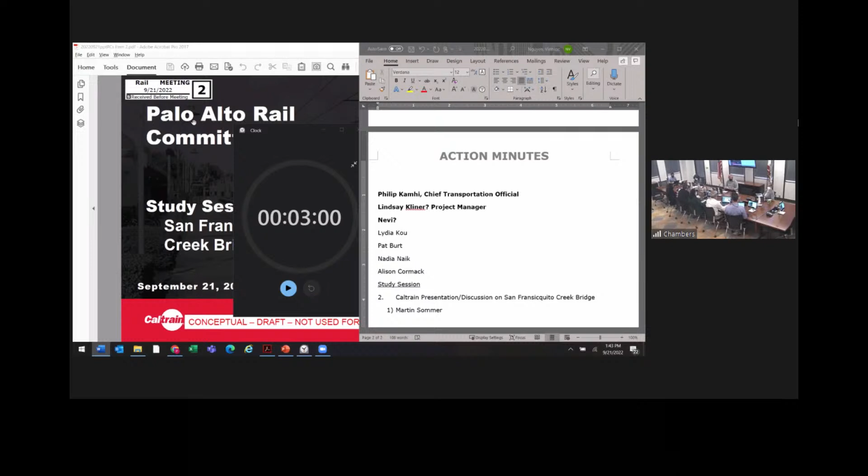Before we move on to the next, we need to take public comment. Oh, yes, thank you. We'll see if there's any public comment. Mr. City Clerk. There are no requests to speak. Okay, very good. Then we can close that and move to our study session. Item 2, the Caltrain presentation, discussion on the San Francisquito Creek Bridge.

Francisquito. Yes. Again, good afternoon, Vice Mayor Kou, Mayor Burt, Councilmember Cormack. We really appreciate the opportunity to share information on one of Caltrain's 98 railroad bridges. Lindsay and I are here to give you that update on the San Francisquito Bridge, providing the background story, an overview and the analysis that we did, our recommendation on next steps, a draft preliminary high-level schedule, and then share some thoughts on goals and next steps. With that, I'll turn it over to Lindsay for the background.

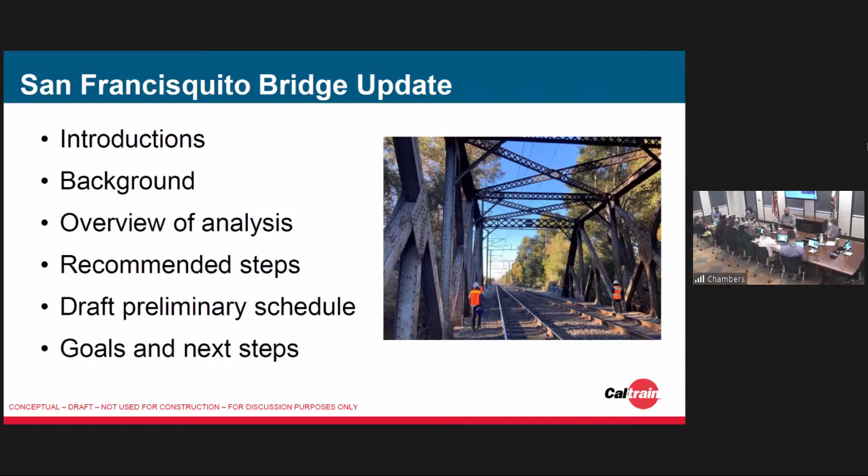Okay, great. Hi, everyone. Just gonna take my mask off for a minute so you can hear me better. Please advance to the next slide. One more. Okay, great.

So I'm going to dive into some of the history of the bridge and the context of the area surrounding the bridge. We've got 2 photos here. The one on the left shows the original structure of the bridge that was built in 1864. The structure was made of wood and it was single track. You can also see the El Palo Alto tree there. The structure that stands today was built in 1902. It's shown on the right, the darker image with the train going through. It's double track, and thankfully is no longer made of wood. It's a steel truss structure, and given that it was built in 1902, it's over 120 years old.

The name for the creek, San Francisquito Creek, gives the name to the bridge itself. It spans over the San Francisquito Creek, which is the border between Palo Alto and Menlo Park in this area. And the El Palo Alto tree is just beside the bridge, very close to the east, shown in both of these photos. It's important to note that the bridge and the tree are eligible for the National Register of Historic Places, and that's a topic we'll dive into more detail later during the environmental phase. Next slide, please.

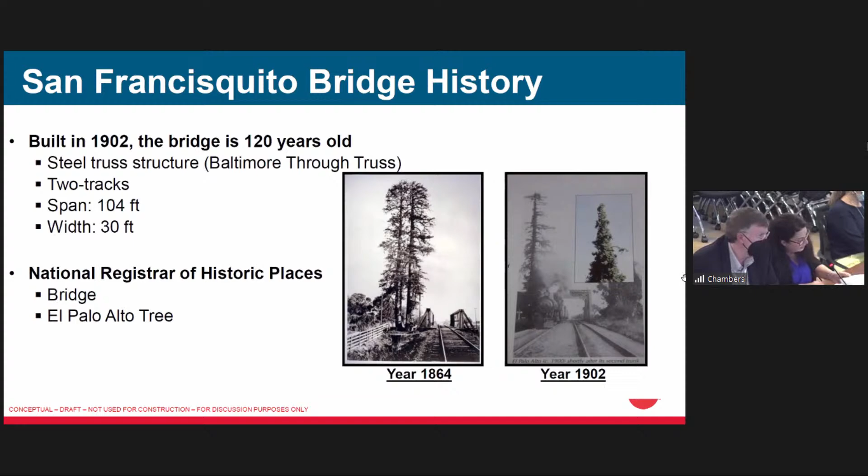Great. So now we're going to look at some maps to get oriented on the geographic context of the project. The creek, again, is the border between your city and Menlo Park. It's also important to note what jurisdictions we're dealing with. Palo Alto is located in Santa Clara County. When you cross over the bridge into Menlo Park, you are in the county of San Mateo. So this geographic area spans not just 2 cities, but 2 counties.

Starting south of the bridge, moving north up the right of way. You can see the north arrow, we've turned it on its side for ease of viewing. We've got the Palo Alto station, almost a half mile from the bridge. We've also got El Camino Park, in green, and downtown Palo Alto on the other side of the right of way. And I want to point out our key area, and we've got colors to help.

In yellow, you'll see the Palo Alto Avenue intersection, which is currently at grade. It is only 330 feet, what I like to call a stone's throw, from the San Francisquito Bridge, shown in red. And we've labeled the El Palo Alto tree with a little icon in green. So you can see how everything's quite close. Not only is this area geographically constrained in terms of space, but the creek itself is a sensitive environment. Some of us may recall it was the site of a serious flooding event in 1998.

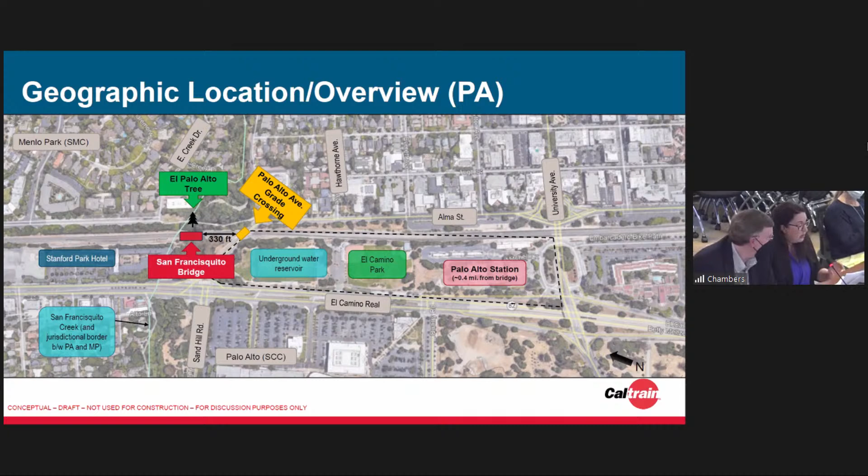And I'd like to move on to the next slide where we can transition slightly north on the right of way and take a look at the Menlo Park context. So moving north into Menlo Park, you can still see the San Francisquito Bridge in red, and then that small yellow rectangle is the Palo Alto Avenue intersection. So first, in sort of a darker blue, we've got the Stanford Park Hotel. That's private property that's just right along our right of way.

Along the back side of the hotel, so that's the west side of the right of way, there is a rain garden / bioretention area that's associated with the Middle Plaza project. And if you just move slightly north, also in turquoise or teal, is the Middle Plaza development. It's being developed by Stanford University. It is their property. It's going to be a mixed-use retail, housing, and commercial development. It's fairly far along. Construction started in 2018. And if you go by there now, you'll see that they started paving and sidewalks.

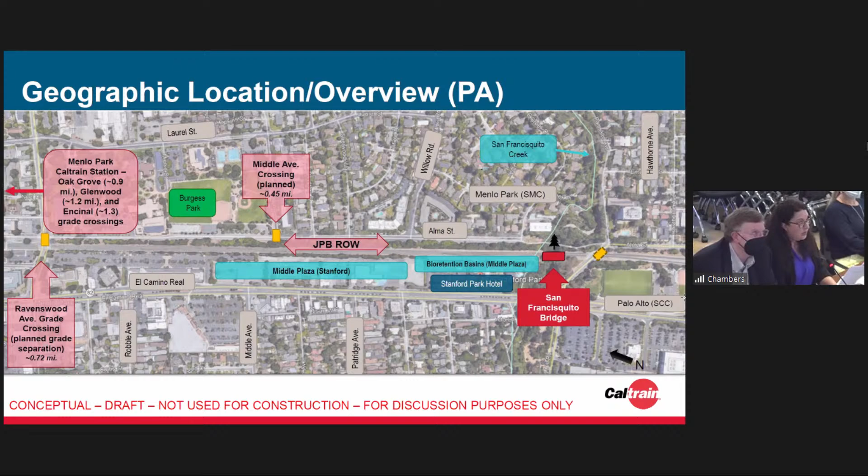Then just a little bit on the other side of Middle Plaza, also in yellow, we have the Middle Avenue undercrossing. And this is a planned undercrossing exclusively for bikes and pedestrians that's currently around 30% design. We are working jointly with the city of Menlo Park on this project and have a service agreement with them.

And then as you move further north, we've got several grade crossings. Ravenswood grade crossing is the first one just past Burgess Park. That is still in the planning stages with the hybrid option currently being recommended by the board in their 2019 project study report. And then as you move further north, not all shown here, there are several other crossings. We have Oak Grove, Glenwood, Encinal, and they're all closely spaced about 1/10 of a mile to 1/3 of a mile apart. And we can move to the next slide.

This just gives you another view. I think it's really helpful just to get that bird's eye aerial view. So this is an aerial viewpoint of the bridge looking north. You can see Alma, El Camino Real, and you can see how close the Palo Alto Avenue intersection is to the bridge. And then in the bottom right-hand corner is a photo of the Palo Alto Avenue intersection looking east. And then also on the right, we've listed exact locations like the milepost, in case that's helpful for orientation.

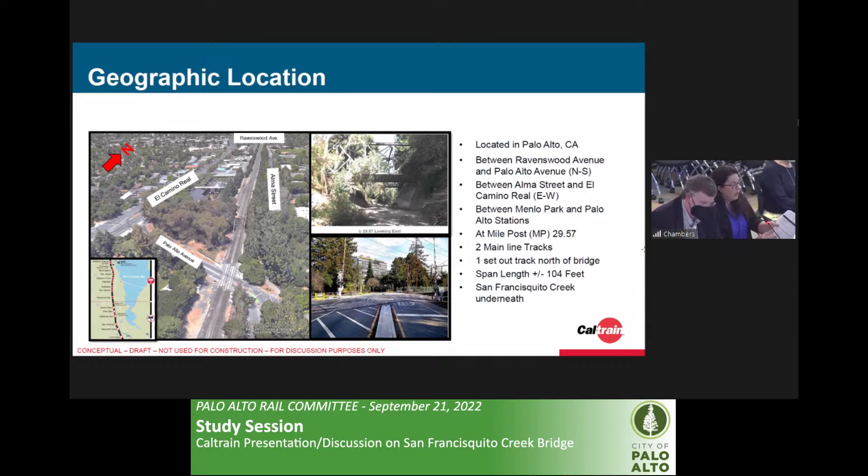I think the key takeaway here we really want to emphasize is that the grade crossing is very close to the bridge. Again, it's about 330 feet away. And next slide, please. So I just want to talk a little bit about our activities to date. So following engagement with jurisdictional stakeholders in the spring of 2021, including Palo Alto staff, we decided that we needed to conduct a detailed inspection and analysis of the San Francisquito Bridge. This was driven by a few factors. So as we mentioned, the bridge is over 100 years old.

And secondly, although we regularly inspect all of our bridges for safety and FRA compliance throughout the year, we needed to do a detailed inspection to understand the condition of the materials underneath the ballast and also any steel elements that can't be seen by the naked eye. So we did just this in the fall of 2021, which Rob will be talking more about in the next slides. We've got some great pictures of when we had our team out there.

And you might also be curious about who we've been speaking with, who are the stakeholders we've been coordinating with during the course of this project. So I mentioned, of course, Palo Alto. We've also been coordinating with the City of Menlo Park, the VTA staff, the San Francisquito Creek Joint Powers Authority, and the Stanford Land Buildings and Real Estate Group.

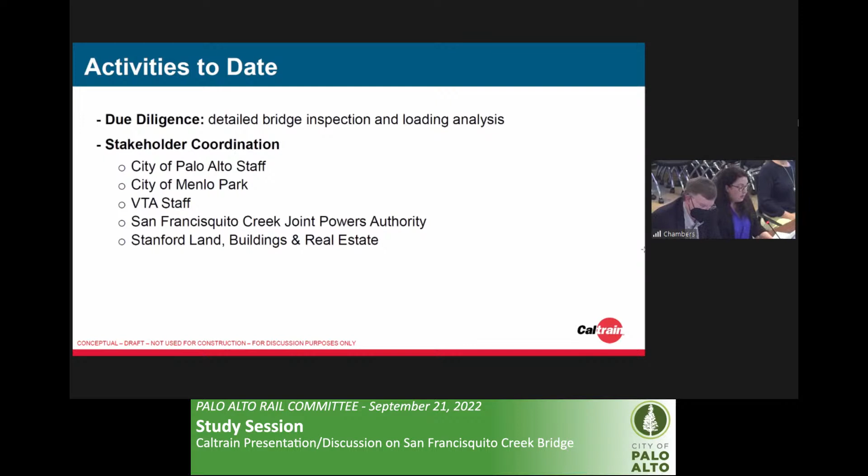And we just wrapped up another round of engagement with these stakeholders this summer where we've been sharing the same information, the same updates we're sharing with you today, where we've come back and said, these are the results of our detailed inspection and our loading analysis. So next, I'm going to pass it to Rob, and he's going to talk about this bridge inspection and what we found out.

Thank you, Lindsay. Next, I'd like to share the information on what we did to improve our understanding of the current status of this 120-year-old bridge. This included 3 weekends worth of work. Our first weekend, our teams removed the debris and vegetation to get a good look underneath the hood. Our engineers also performed inspection of the track and the bridge members from the upper area. And we also documented existing conditions with some on-site photos of the bridge, the El Palo Alto tree and the surrounding conditions. Next slide, please.

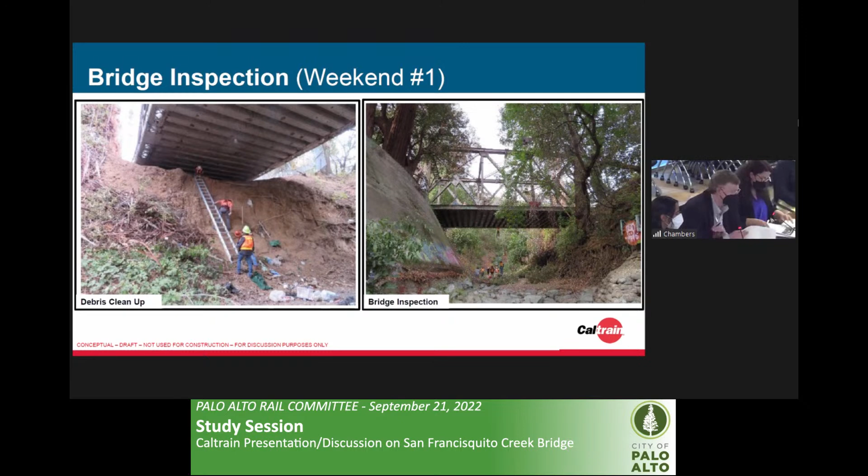During our second weekend, we performed 3 distinct activities. The first was performing the inspection of the underside of the bridge now that all the debris was cleared away. The second was performing a detailed LiDAR scan of the bridge to create a highly accurate 3D model to support our structural analysis. And the third thing we did was set up equipment to measure the live load deflection. So we set up some high-speed cameras and measured how much the bridge flexed under loading. So when both freight trains and passenger trains went across the bridge, we could look at what the loading deflection was. Next slide, please.

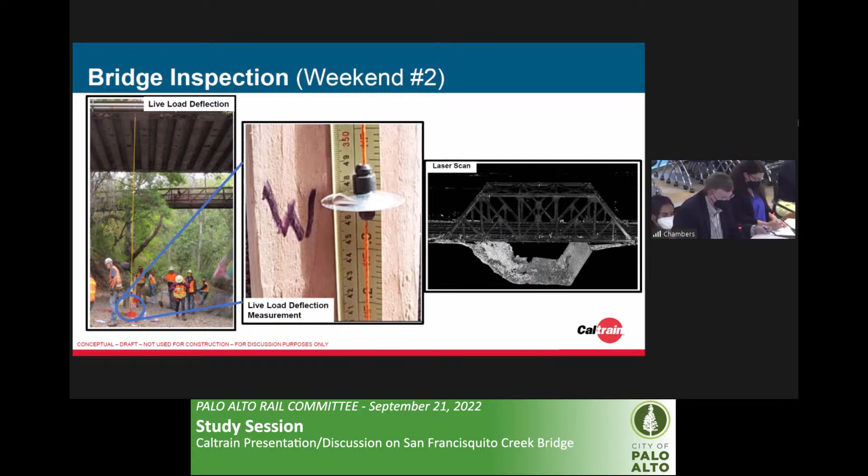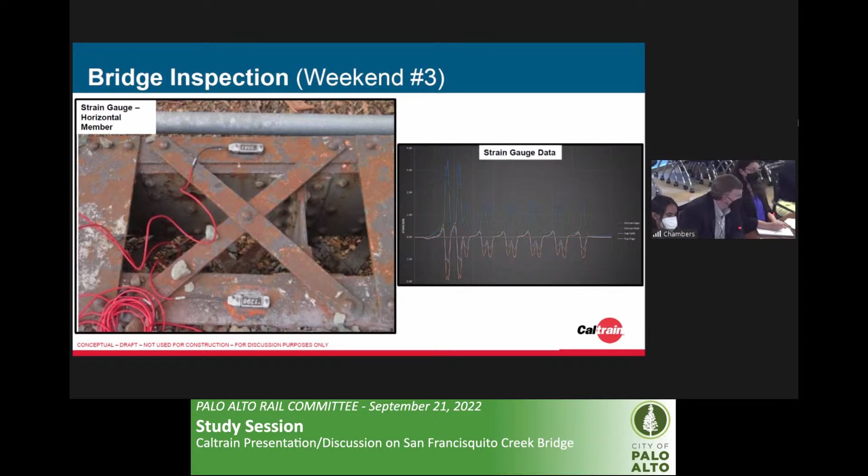During that third weekend, we also installed strain gauges on both the horizontal and vertical members of the truss to record stresses. You'll see that graph on the right. It's got some tall peaks and some short peaks. Those tall peaks are UP's freight trains, which have heavier loads. And the short peaks are from Caltrain's passenger trains that have lighter loads. Next slide, please.

Also during that third weekend, to support our structural analysis, as any engineer wants more information, more data. So they really wanted to find out, what is that 120-year-old steel really like? So we needed to get some samples to analyze the metal composition and determine its strength. So the first thing you see is we created an enclosure so the sparks wouldn't cause any issues with the surrounding vegetation. We collected the samples you can see on the right and sent them off to the lab for figuring out the metal composition and the capacity of that steel, how strong that steel is. Next slide, please.

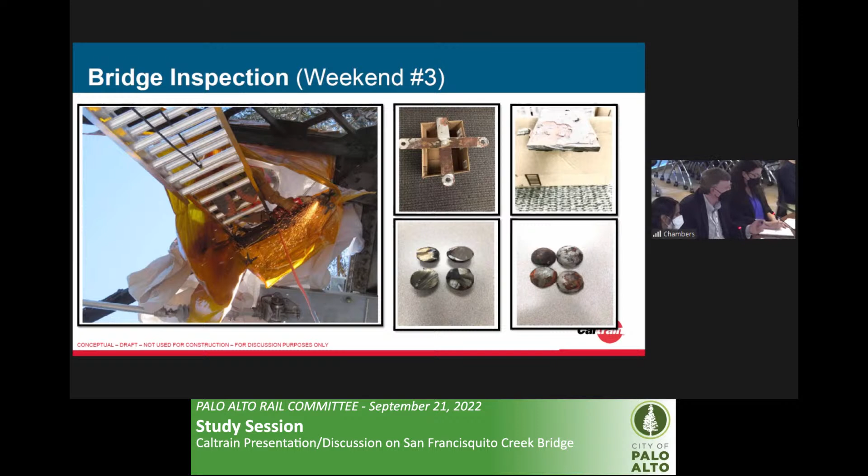So with all of that work and a whole lot of structural calculations, what did we learn? First of all, we learned the bridge is not in imminent danger of collapsing. That's good news. We also found no cracks. That's also good news. However, given its age and 120 years of continued use, the cracking risk has increased and will continue to do so. We found for a bridge of its age that the members are in pretty good shape and have minimal deterioration. However, the strength testing found that the material was weaker than we expected. So our analysis determined that the bridge rates below AREMA's normal freight live loading requirements.

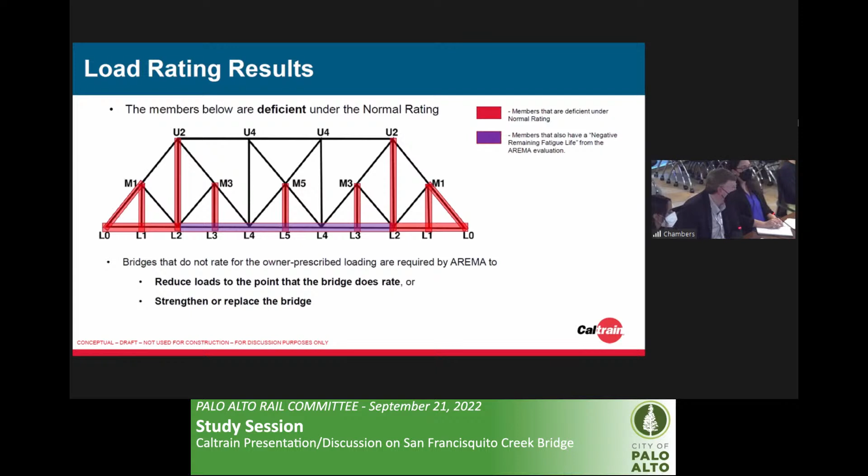This graphic illustration of the bridge shows the structural members. Those highlighted in red are deficient under normal rating. They don't meet normal freight live loading requirements. The members in purple have a negative remaining fatigue life. Industry best practices recommend that when you have a negative remaining fatigue life, action is necessary. Next slide, please.

So we developed some recommended next steps. It's important to remember that Caltrain has two primary roles on the corridor. First, of course, is to maintain the railroad in a state of good repair to provide that efficient and reliable service that our communities depend on.

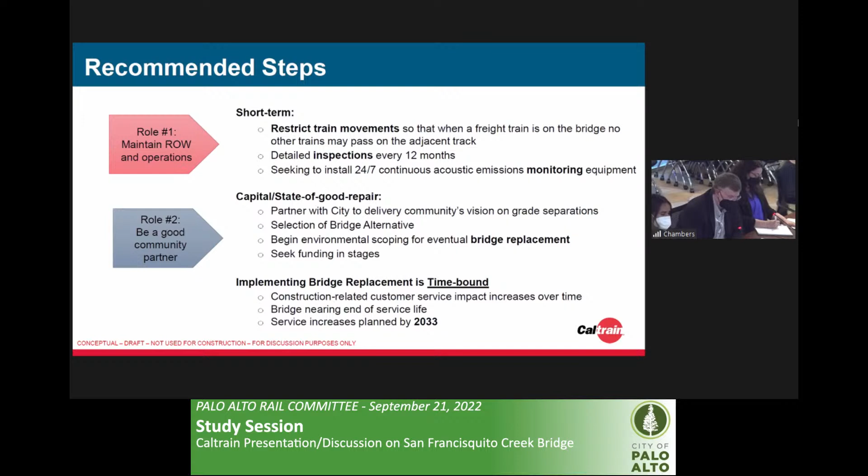However, implementing the replacement of the bridge is time bound. The bridge, as you heard us say, is 120 years old. It is nearing the end of its service life. We're doubling our inspections. We're seeking to add acoustic emission monitoring 24/7. We're restricting train movements, 1 freight train at a time, passengers hold. And we'll need to take action to replace this bridge in the near future. However, replacing this structure is complex and in a sensitive environment, and that's going to take quite a bit of time.

Additionally, as you know, this is in a highly constrained right-of-way, and there appears to be no room for a 2-track shoofly. So construction will impact the traveling public, it will impact freight, and it will impact the community. The longer we wait, the older the bridge gets. The longer we wait, ridership is forecasted, we hope, to increase. And with these considerations, the bridge really needs to be replaced by 2033. Next slide, please.

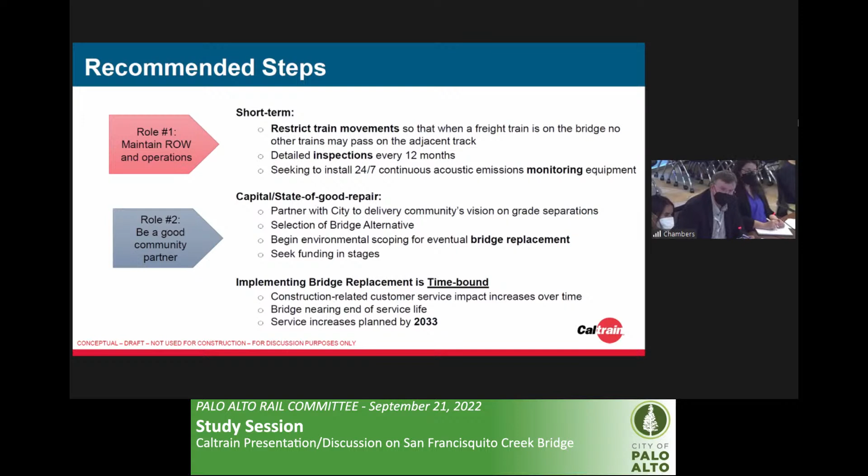But I want to put that a little bit in context. What does it mean for the Palo Alto community, the commuters that live and work here? As you remember, prior to the pandemic in those days, right? We all look back fondly on those days. Palo Alto Station had 3 of the top 15 fullest trains on the Caltrain system. Number 2, number 5, and number 9 for the southbound commute.

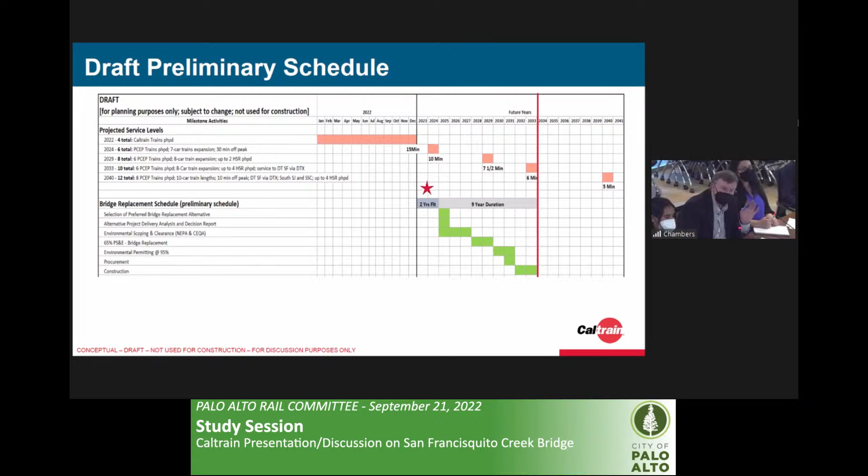This next section shows a very preliminary high-level draft schedule. You can see with the star there, those are those 2 years that we really want to spend time digging in and coordinating and planning as best that we can in the time we have. In 2025, we hope to select a preferred bridge alternative, the what. And then also in 2025 is work on the alternative delivery analysis and decision report, and that is the how.

That is, is it a CMGC? Is it a progressive design-build? Is it low bid? Is it a P3 or is it other? What would be the construction delivery method? Because I think on this bridge, the how matters a lot.

The next couple of years are getting the NEPA and CEQA environmental clearance. This is a highly regulated area with many, there's a long list of permits that will be necessary. We figure it'll take about 4 years to get to the design and procurement process. It'll take a couple of years for construction. Next slide, please.

Between now and when the bridge is replaced, we'll continue with those operational restrictions: one freight train at a time, passenger trains hold while the freight train goes by. And we'll continue our increased monitoring, continuing to do detailed inspections until the continuous acoustic emission monitoring is in place. So we'll continue to do that. Next slide, please.

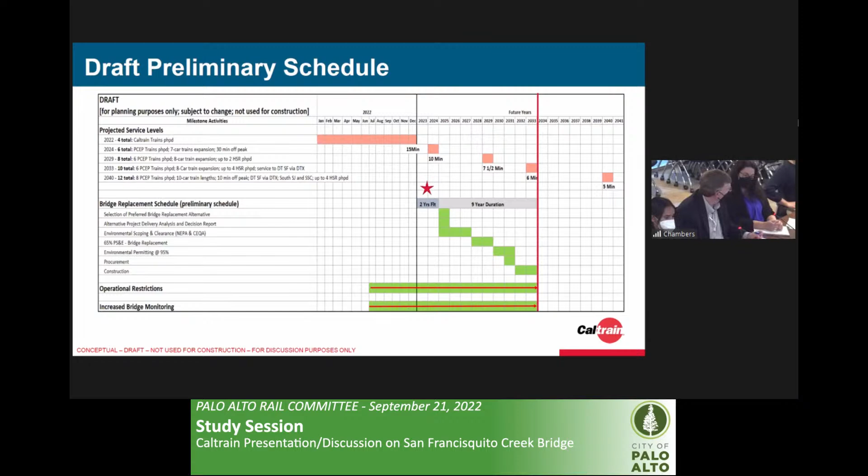Goals and next steps. I'd like to share some information on our thoughts on our goals and potential next steps. As you've heard me say, Caltrain's goal is to be a good community partner. There are 41 at-grade roadway crossings on Caltrain's right-of-way. As this committee well knows, and others along the corridor, there are many benefits associated with the grade separation project. Although not a regulatory requirement for much of Caltrain's right-of-way, as a community partner, these are high priorities for Caltrain.

Caltrain is the implementing lead for projects in our operating right-of-way. Currently, there are 5 grade separation projects in active design for approximately $1 billion that we have right now. We're working with South San Francisco on South Linden Avenue. We're working with San Bruno on Scott Street. Those projects have gone to our board. We're issuing RFPs for preliminary engineering.

The Broadway grade separation in the city of Burlingame is in final design, and Rengstorff and Castro in Mountain View are active as well. Castro was in final design, and we're just now advancing the PE and final design with Castro, and VTA just authorized another $42 million to advance that project. And we have agreements with them to use the Measure A, Measure W, and Measure B funds for those projects. And as you well know, there are many more that are in planning with local jurisdictions. So there's a lot of work.

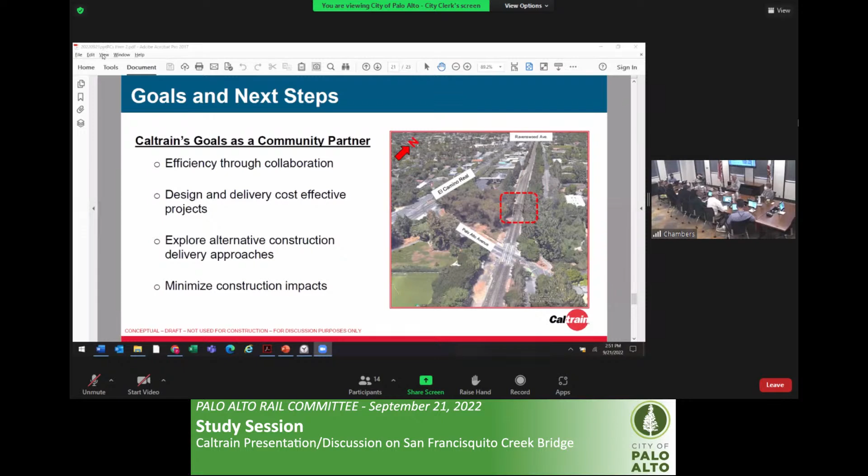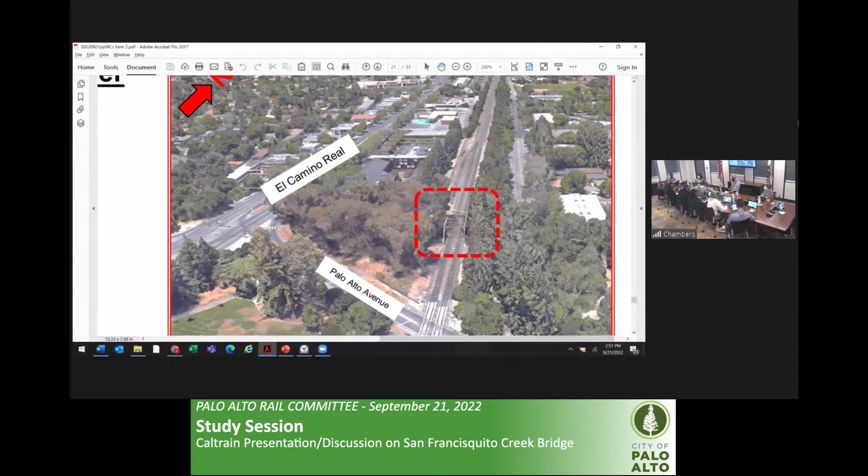Ms. Nayak? Thank you. So the clerk's going to pull up an image for me. In this image right there, is there any way you could zoom into the picture a bit more? I don't know how high quality it is. It's okay. I don't know if you could see, but behind, oh, there we go, behind the Stanford Park Hotel, there's actually a siding. Do you see the extra track? Yes. Set out track, yes.

Right. And so one of the things that had always been discussed among the rail nerds, because we talk about this stuff, is could you use that as the shoofly track, or is that the new placement of the bridge? Yeah, I had that as a single track shoofly in my notes, but we hadn't studied it enough, so I didn't say it. And I understand that further back you've got this new bioretention area, which is further behind, right? But there is this space behind the Stanford Park Hotel with a little more wiggle room, and my understanding was that helps straighten part of the curve.

Like if you move the train bridge over literally one set of tracks, not two, just one, into that second one, you would be able to both fix the high-speed rail alignment issue and come into the station area at the correct angle. So I don't know if that's correct, but I'll throw that out there for you to think about when you do your homework. Another possibility could be that the historic bridge gets left and converted to a bike and pedestrian bridge or something. So just throwing it out there.

There's no room. We've got a bike and ped bridge now. There is one, I was going to point that out. You can't see it here because of the Google map view and the trees, but it was constructed in the 90s, alongside it, and there might be another view where you can see it. But another thing we have talked about is the bridge structure itself is historic. There have been instances of agencies donating that structure as public art at playgrounds, so there's a lot of possibilities.

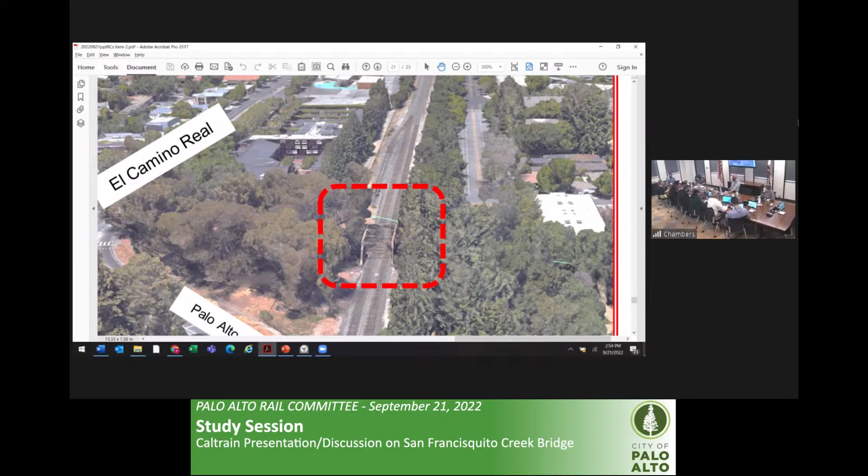And initially, we did some surveying. Page 5. Yeah, we did some initial surveying. I want to say it was like early 2021 when we were getting ready for the inspections. That's when we noticed them. And it's not on our right of way, right? But it's so close that we have to take that into consideration.

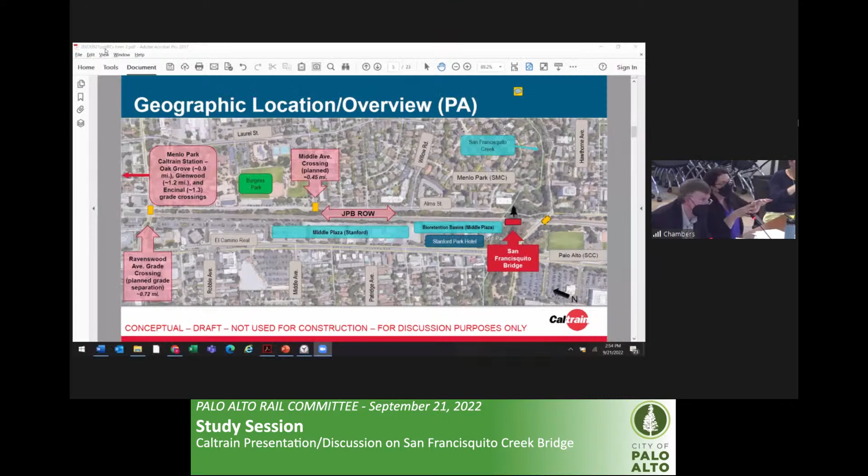And then the fact that they told us it's going to become a rain garden, meaning there will be willows, there will be reeds, it's going to change over time. And that's part of their policy, I think, of having more of a stormwater treatment facility associated with Middle Plaza. But I'm sure that Menlo Park could tell you more about it. But yeah, it's right there.

Yeah, I see. Essentially, yeah. So we wouldn't own that land anyway, right? But now it's taken up by something that's now a natural feature. So to have to point that out, yeah.

I did want to point out, the distance between Meadow and Charleston and our neck of the woods is 1/3 of a mile. And the distance from Palo Alto Avenue to the Ravenswood crossing, as they have, is 0.72. And I think it's a little bit over half a mile where you start to think about those grade separations together. So we're real close.

I also wanted to say, to Mayor Burt's point, I don't know if you guys have had access yet to the LiDAR study that was done of the tree roots by the city arborist. They had some new technology on tree mapping, and I'm happy to share that with you. That'd be terrific. Yeah, we had these comments over the years.

So I have the original study that was done by Dave Dockter, who was the longtime Palo Alto arborist. And then Robert Booty, I think, is our current arborist now, or at least the one who gave me the documents a few years ago. But I do have those, and they were able to use some new thing that shows you exactly where the roots of the El Palo Alto tree are.

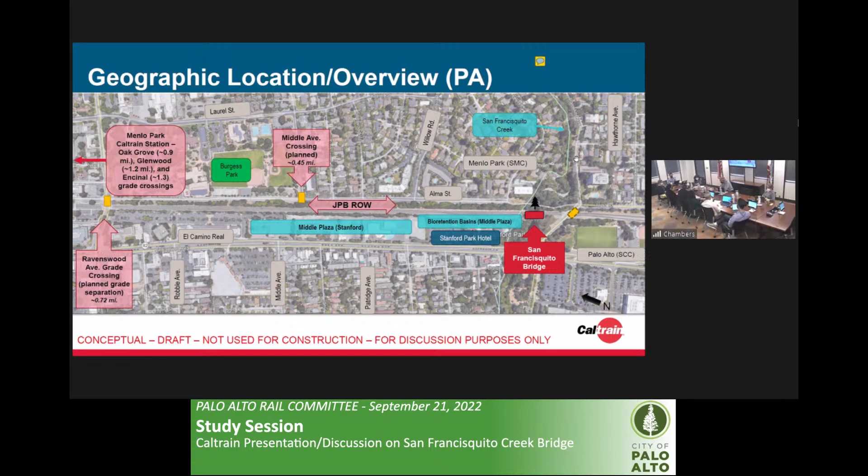But I did want to ask Philip, did you have something to say? I mean, I think the time's passed, but I was just going to mention the different transit services that are at the station. There's AC Transit, as you mentioned, which is the Dumbarton Express. There's SamTrans, VTA. Then we have the Stanford Marguerite, and also several different private employers that have their buses there, and local regional shuttles.

I mean, most of my comments and questions have been asked by Mayor Burt and Nadia, but I did want to say, when you talk about integrated teams, it's not just for construction, design, et cetera, but also for the transit component afterwards, making sure that there is first mile, last mile, and so forth. But also, Philip, how does this fit into our work plan? Because I don't think this was part of our work plan. So I actually do believe that we included this as part of the work plan in anticipation, because we knew that the study was going on.

As they mentioned, we met back in 2021 initially to discuss that the study was going to happen. I believe the study got delayed a little bit, but then the study happened. So we knew this was coming, so I believe it is incorporated in the work plan list. Yeah, thank you. Okay. Thanks. Ripon's is saving my memory here. Yeah, so it was included. So I do believe this is totally within the scope of the rail committee.

So in a way, we're going to have to take a look at this, regroup, and then how to incorporate this, prioritizing it, because I know every time I see Molly peeking over. Okay. So we just have to reprioritize and look at where everything comes in, because South Palo Alto is very eager about the Charleston and East Meadow grade separations also. So let's take a look at that.